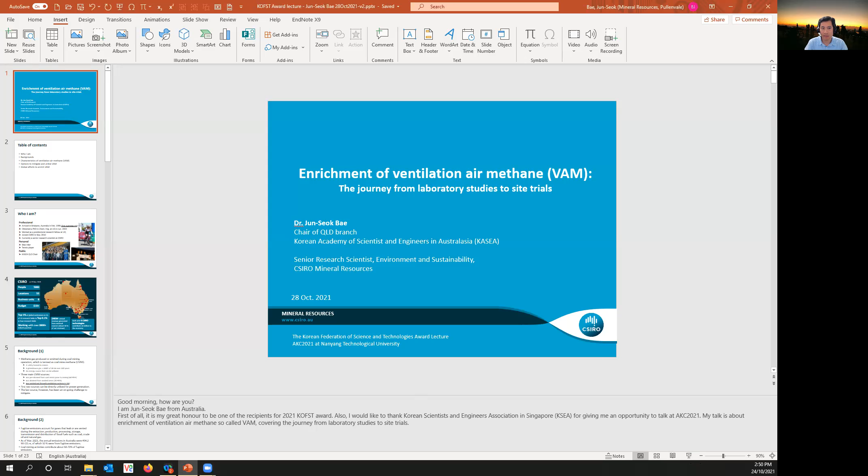My talk today is about enrichment of ventilation air methane, so-called VAM, covering the journey from laboratory studies to site trials. Firstly, I will talk about a little bit of myself, then cover some background for those not familiar with VAM. Understanding the characteristics of VAM would lead to feasible options to mitigate and utilize it. Amongst the available options, my talk will focus on global efforts to enrich VAM.

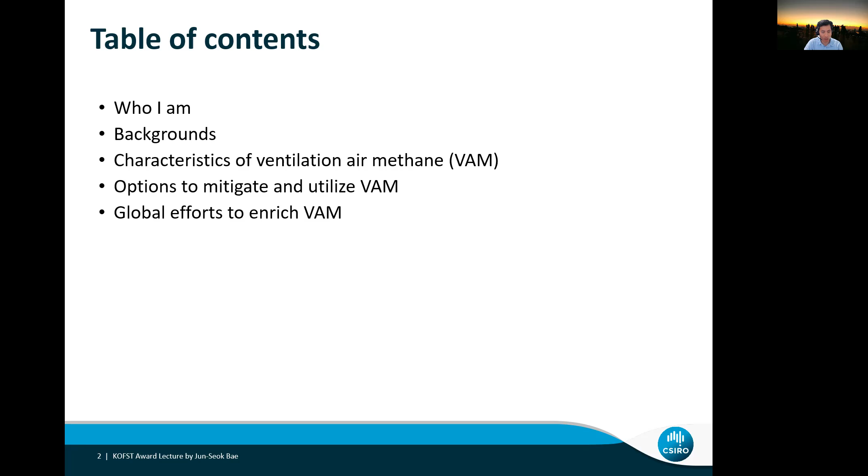Who am I? Well, I came to Australia to obtain a PhD in 1999, which was my first overseas trip. Ever since then, I've been living here in Australia. In 2004, I received a PhD in chemical engineering at the University of Queensland and then worked for a while before joining CSIRO in 2010. Personally, I'm a bike rider. Actually, last Sunday I rode 100 kilometers from Brisbane to Gold Coast with an average speed of 33 kilometers per hour.

Also, I'm a tennis player. I have won some competitions. Publicly, I'm the KASEA Queensland chair. Especially, I was the local chair of 2018 AKC in Brisbane.

CSIRO stands for Commonwealth Scientific and Industrial Research Organization, one of the most multidisciplinary research organizations in the world, with staff located at many sites throughout Australia and 3 overseas. I'm based in Brisbane, one of the sites in Queensland.

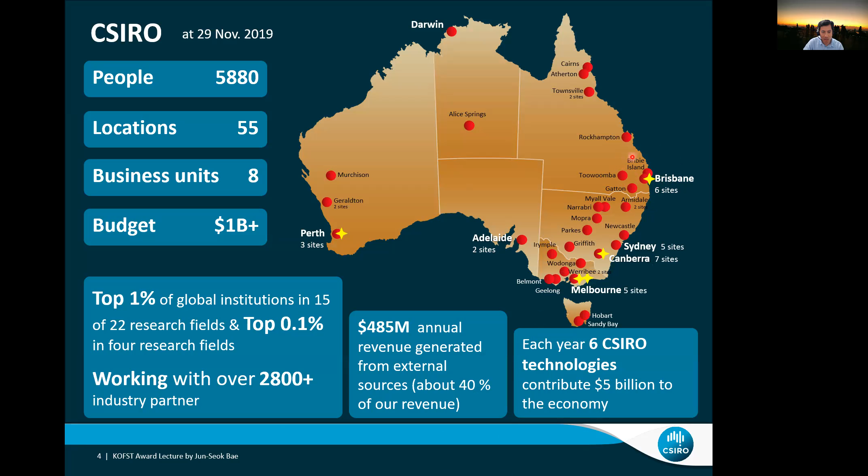There is a term called coal mine methane, CMM, which is methane gas produced or emitted during coal mining operations. Methane gas is a safety hazard to miners and also a greenhouse gas, with a global warming potential of 28 to 36 over 100 years. Also, methane is an energy source that can be utilized. There are 3 main CMM sources.

Prior to mining, you need to drain for safe operation, so that methane gas concentrations are between 60 to 95%. During mining, you also need to drain the gas, typically 30 to 95%, depending on site specifications. The last source is the ventilation air supplied for miners underground, which typically contains less than 1% methane.

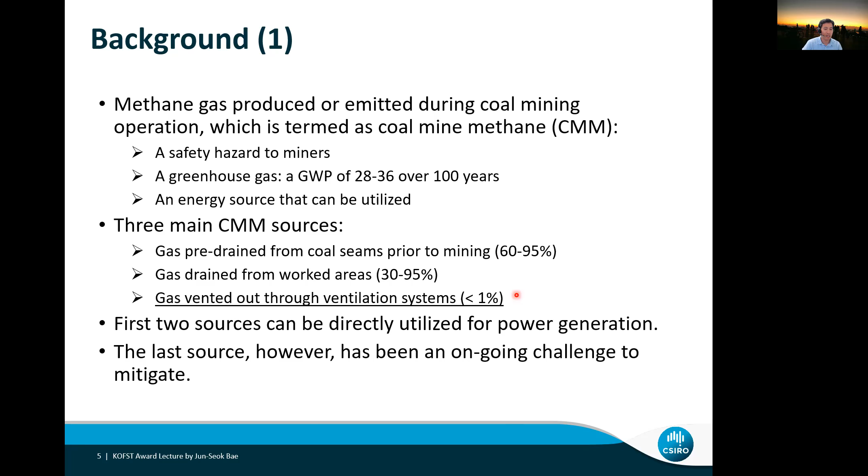The first 2 sources can be directly utilized for power generation, but the last source has been an ongoing challenge to mitigate. Fugitive emissions account for gases that leak or are vented out during processes related to fossil fuels, such as coal, crude oil, and natural gas. Methane in ventilation air from underground coal mines is the major emission source of coal mining activity. This is the main reason we focus on VAM to reduce greenhouse gas emissions.

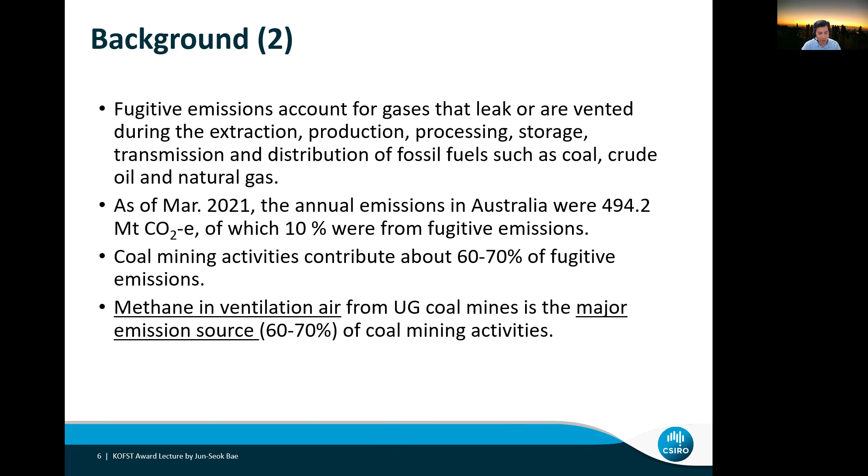Firstly, we need to understand the characteristics of VAM to deal with it. Ventilation air has huge and variable volumetric flow rates. In typical gassy mines, ranging from 120 to 600 cubic meters per second, and also very dilute and variable methane concentrations from 0.2 to 1% in air. There is also some CO2 present.

Ventilation air contains lots of moisture and has very high relative humidity, almost 100% saturated. It also contains dust particles, as you can see in this SEM image. The photo on the right shows a ventilation shaft with suction pumps taking air from underground and venting it out.

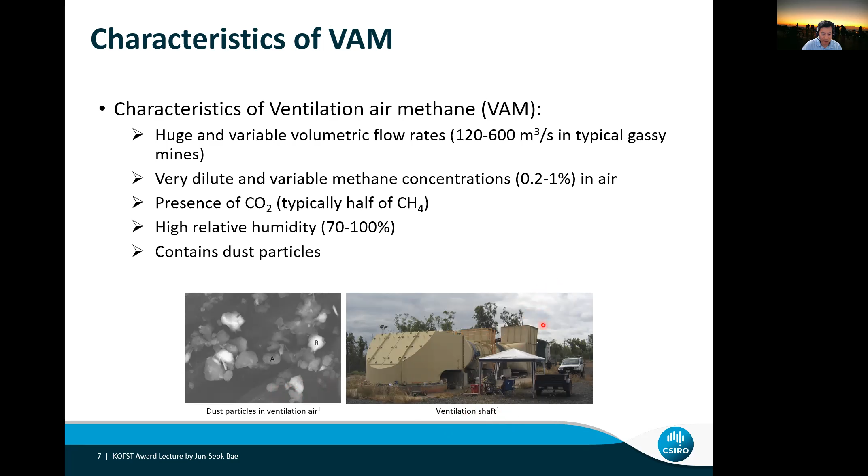So once the characteristics of VAM are understood, how do we mitigate it? There are typically three options. Firstly, VAM can be oxidized as a primary or supplementary fuel, converting methane into CO2 to reduce greenhouse gas emissions. Secondly, it can be utilized for power generation. The last option is to capture and enrich it to a certain level so that other mitigation units can utilize it.

At CSIRO, all three options have been investigated and site trialed at an Australian coal mine. The first photo shows a prototype unit to oxidize VAM directly. The photo in the middle is a power generation unit that requires a constant methane concentration in the feed stream, generating about 25 kilowatts. The last one is a VAM enrichment unit that I designed. My talk today is about this VAM enrichment unit and how we developed the whole process.

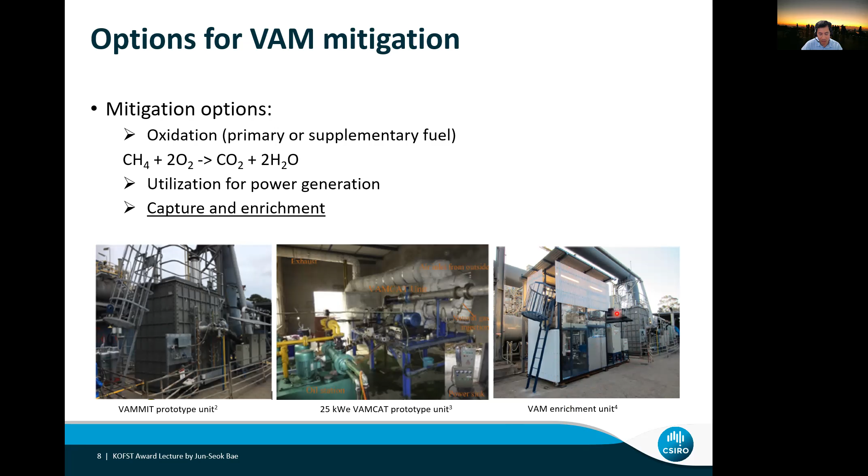So what was the motivation for VAM enrichment? Here are some key motivations. As I mentioned before, power generation units require a minimum methane concentration, so a supplementary fuel is typically required for self-sustainable thermal balance. Also, for stable operation of mitigation units, we need a stabilizing mechanism to ensure stable operation and minimum maintenance for continuous power generation, acting as a buffer. VAM enrichment also offers more greenhouse gas emission reductions than simple oxidation, because simple oxidation generates CO2.

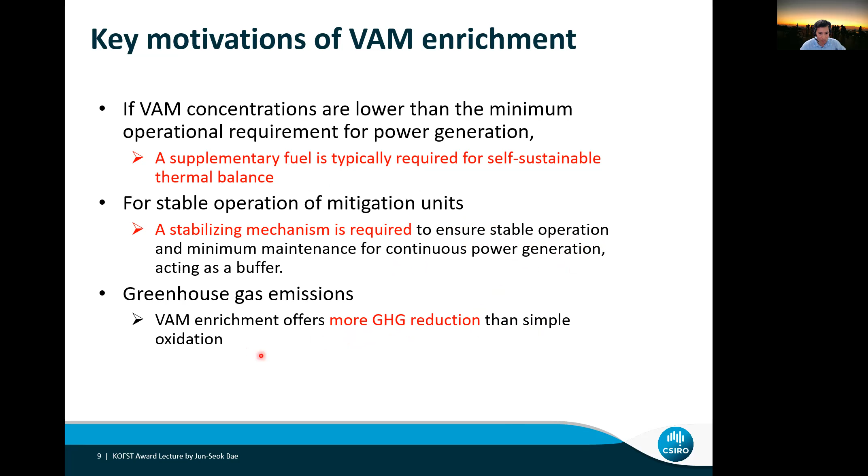In the course of any VAM enrichment process, we need to avoid this explosive range in gas phase methane. In addition, it will be good to keep the oxygen level below 12 percent, so it's safer to operate.

So there are several options to enrich VAM. Hydrate formation requires pressurization, having slow kinetics and low methane recovery.

With ionic liquids, CO2 is preferentially absorbed over methane, and it requires long gas-liquid contact time, so you can imagine the design and size will be huge, bigger than other processes. And for membrane separation, the membrane itself has low selectivity over other gases, and we also need pre-treatment to remove dust, which requires more capital and operational cost.

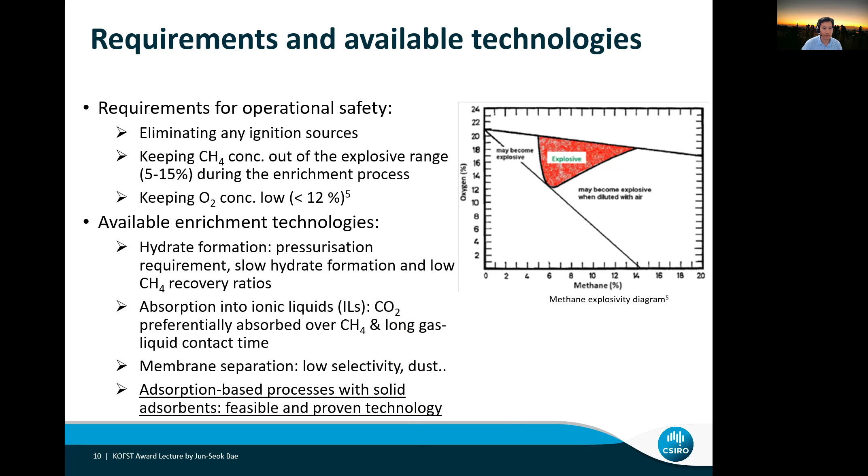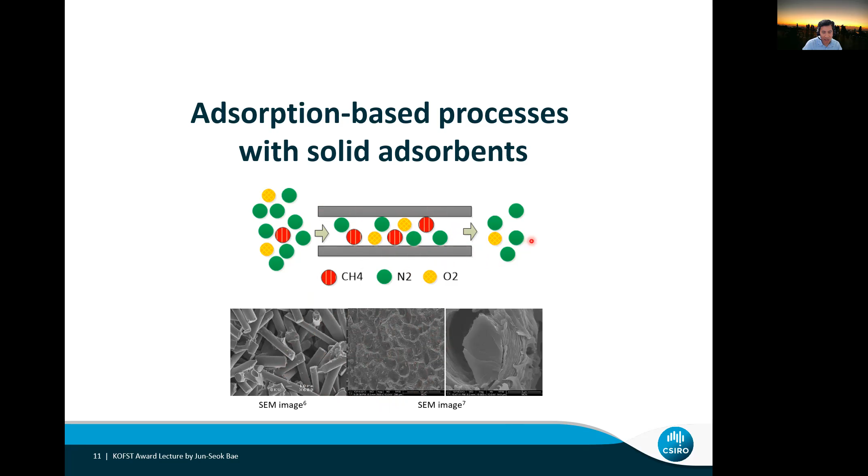Let's talk about adsorption-based processes with solid adsorbents. There are two research directions: development of the process, how we capture and release the captured methane and how we operate, and also how we make good adsorbents to deal with the characteristics of VAM. So at CSIRO, we have been investigating both sides.

Initially, the adsorbent needs to have a high methane adsorption capacity, and also high methane selectivity over nitrogen and oxygen. We also need fast adsorption and desorption kinetics, adequate mechanical strength, and chemical stability and tolerance, especially to moisture, since there is moisture in the ventilation air, so it should have negligible effect on methane capture capacity.

Also, the regeneration energy is the main source of energy consumption for this process, so you need to minimize the regeneration energy, and of course the adsorbent cost needs to be considered.

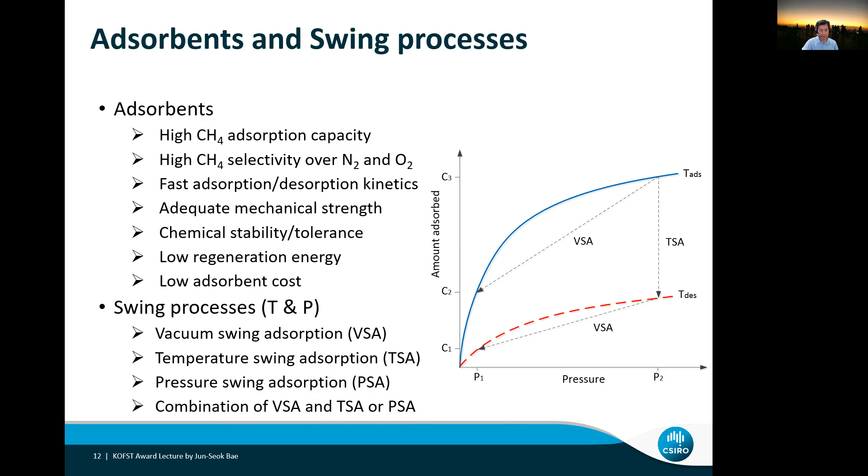The gas adsorption capacities of any solid adsorbent should be considered at relevant partial pressure rather than ambient pressure. The effect of moisture should be tested to be negligible for VAM enrichment. Remember that ventilation air contains almost 100% humidity.

Also, the adsorbent should be in structured form, either pellets or monolith, for scale up. If you have powdery samples, it's hard to scale up, and there are also lots of engineering issues during the process.

Suppose we have 3 samples, A, B, C. If you look at the adsorption capacity at 100 kilopascal, which one is best? Of course, sample B is best. But if you look at the relevant partial pressure, which ranges from 0.3 to 1 kilopascal, sample A is the best.

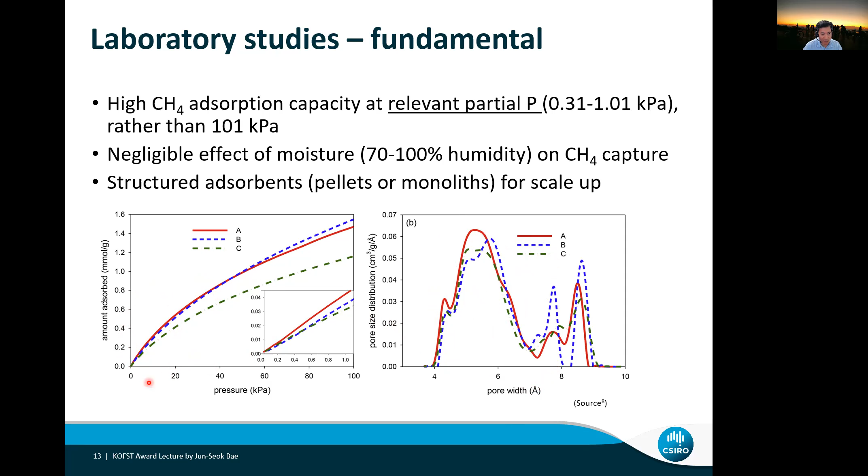This is confirmed by looking at the pore size distribution. On the right-hand side, sample A has higher peaks of pore sizes less than 6 angstrom. So you can either check the pore size distribution at this range, or the adsorption capacity at relevant partial pressure, to select the best adsorbents for VAM enrichment.

At CSIRO, we have been developing carbon composites to meet the requirements I mentioned before. As you can see from the graph, CSIRO's carbon composites possess almost double the methane adsorption capacity of commercial activated carbon.

I didn't show the detail here, but if you look at the low pressure range, it's more than 2 times higher.

So we made carbon composites in a honeycomb monolithic structure to deal with the high dust environment and reduce pressure drop at the lab small scale. We looked at the detailed compositions and also conducted laboratory breakthrough tests.

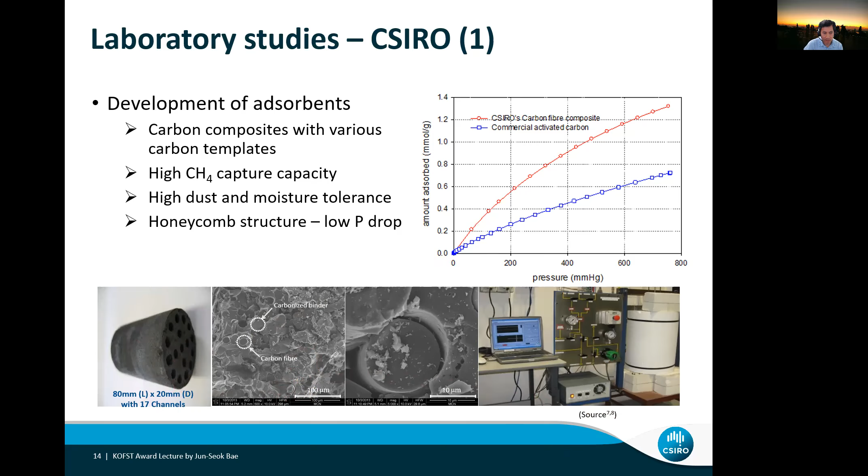We also improved the methane capture capacity by using bio-waste such as Macadamia Nut Shells. About 40% of the world's macadamias are produced in Australia. The Macadamia Nut Shell contains lower ash content than other nut shells, giving it high methane adsorption capacity.

We also tested the moisture effect on methane capture capacity and found it negligible. You can see here we improved from carbon fiber composites to Macadamia nut shell derived composites, improving the breakthrough time, meaning increased performance capacity, while the moisture effect remained negligible. If you look at the low pressure range, we improved about 35% over the carbon fiber composites we made previously.

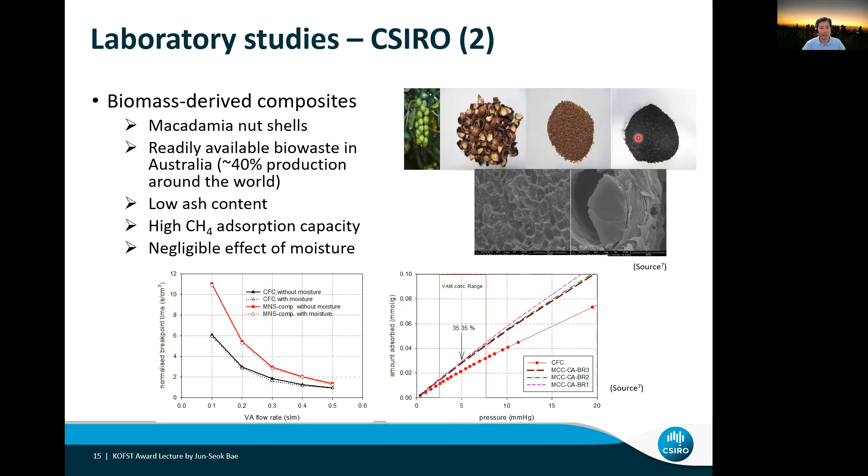So that's Macadamia nuts in a tree, and this one is a shell. We grind, carbonize, and make composites with other ingredients.

Along with the adsorbent development, we investigated suitable processes. There are two processes that have been used for VAM enrichment. The first one is vacuum pressure swing adsorption, called VPSA. University of Science and Technology in Beijing enriched VAM from 0.3 to

7.73%. Another university increased it from 0.42 to 1.09%. At CSIRO, we used vacuum and temperature swing adsorption process, so we can enrich 5 to 11 times, and we can regulate how much we want between 5 to 11 times by regulating the vacuum pressure.

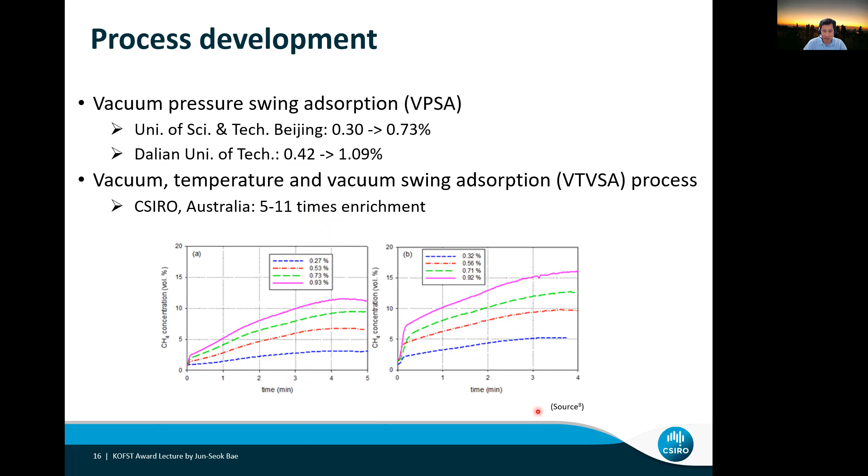So that's 5 times enrichment on average. On the right-hand side, the figure shows 11 times enrichment on average, which is the world's best result.

For the process level, we made large carbon composites in rectangular or cylindrical shapes. The length is about 10 centimeters, the width is about 3 centimeters, and the height is about 20 centimeters. This one is slightly bigger.

The basic idea of the VTVSA process is that the initial vacuum removes mostly nitrogen and oxygen from the composites, because the affinity of methane is greater than that of nitrogen and oxygen. The composites are then heated up to desorb the captured methane, and finally we apply a vacuum again to take the desorbed methane out of the composites.

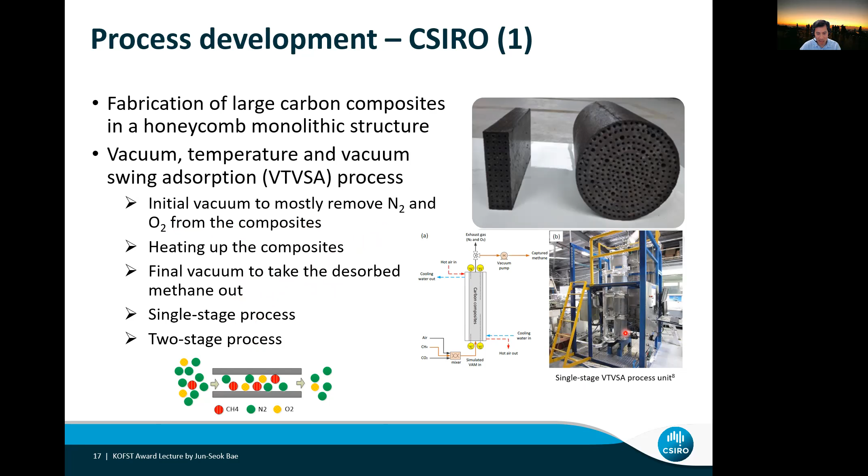So we developed single-stage and two-stage processes. The photo here shows a single-stage unit that I designed. As I mentioned, with the single-stage process we can achieve 5 to 11 times enrichment.

With understanding from the results of the single-stage processes, we designed a two-stage process to operate in a safe manner at the coal mine sites.

What makes our technology unique is that the enrichment process stays out of the methane explosive range, increasing methane concentration from less than 1%

to less than 5% through the first stage, and then increasing methane concentration through the second stage to over 20% or 25%, depending on the initial vacuum pressure. So we can regulate the initial vacuum pressure to keep the gas phase methane below 5% after stage 1, and then it jumps to over 20-25%.

So in stage 2, this is in the adsorption phase, and it's safe as long as it's not in the gas phase.

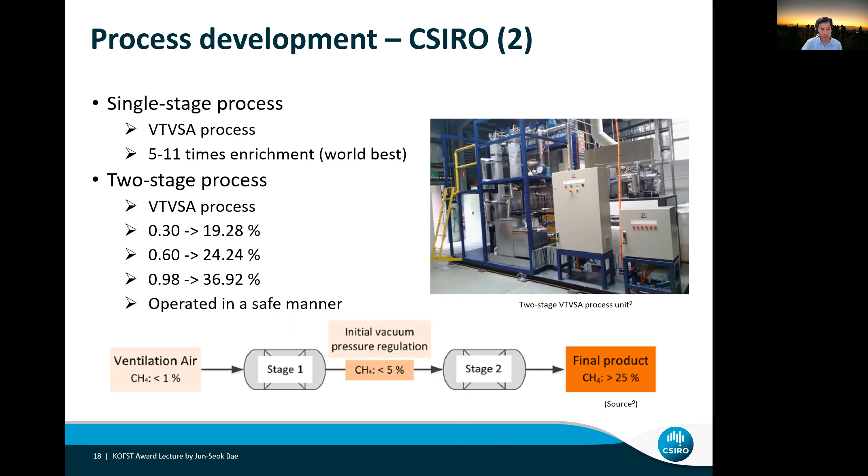This is a two-stage VTVSA process unit that I designed. This unit went to the site and we tested it.

As of today, two processes have been site trialed. The first one is at the Julong mine site in China. They used coconut shell activated carbon with a two-stage vacuum pressure swing adsorption process, with treatment capacity of about 500 cubic meters per hour.

The enrichment performance went from 0.2 to 1.2%, and they operated in continuous mode.

Whereas at CSIRO, we used carbon fiber composites with a two-stage vacuum temperature and vacuum swing adsorption process. Our treatment capacity is smaller than the Julong mine site.

The enrichment we obtained with real VAM went from 0.58 to 28%.

Because the VAM concentration varies, this is the averaged one: 0.73% to 32%.

As I mentioned before, we operate in batch mode, so if we operate in continuous mode, we expect this performance would be improved further.

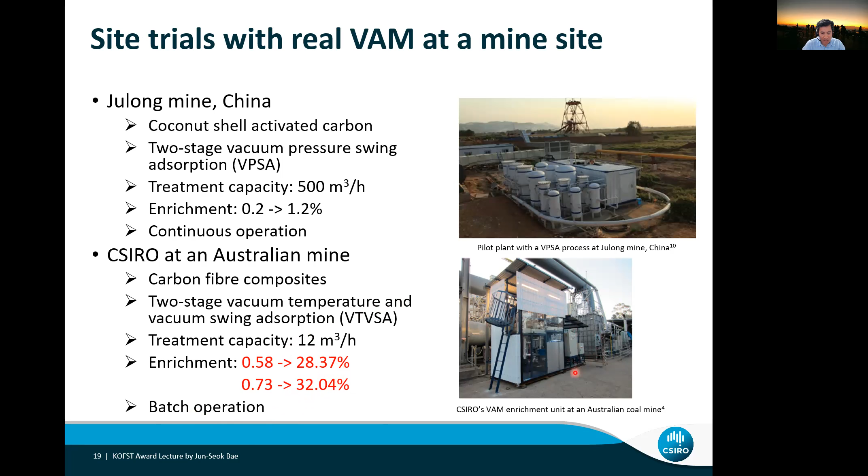In summary, mitigation of VAM is an ongoing challenge due to its intrinsic characteristics. In terms of VAM enrichment, adsorption-based technology is the way to go.

We have been studying in this area for many years, and our conclusion is that adsorption-based technology with solid adsorbents is the approach. Adsorbents need to be structured and tolerant to moisture and dust environments, which is why we chose a honeycomb monolithic structure that can be applied at the mine site.

CSIRO developed the world's best results with the single- and two-stage vacuum temperature and vacuum swing adsorption processes. We also successfully demonstrated this technology in a safe manner at an Australian mine site. We went through all the mine site regulations and standards for site trials, and we made it successfully.

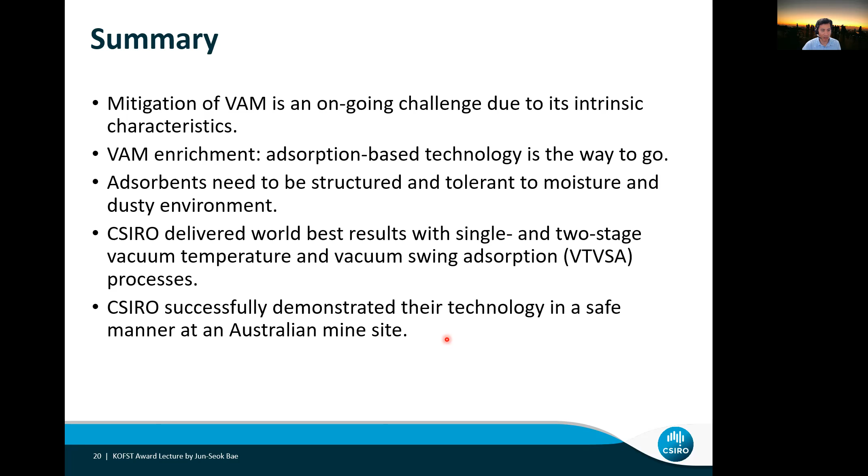A special thanks goes to Dr. Shi Su, who leads the emissions abatement team in CSIRO Mineral Resources. His dedication to VAM research is well recognized in this area. I would also like to thank his team members, including Xin Yu and Jun Yin, for their support.

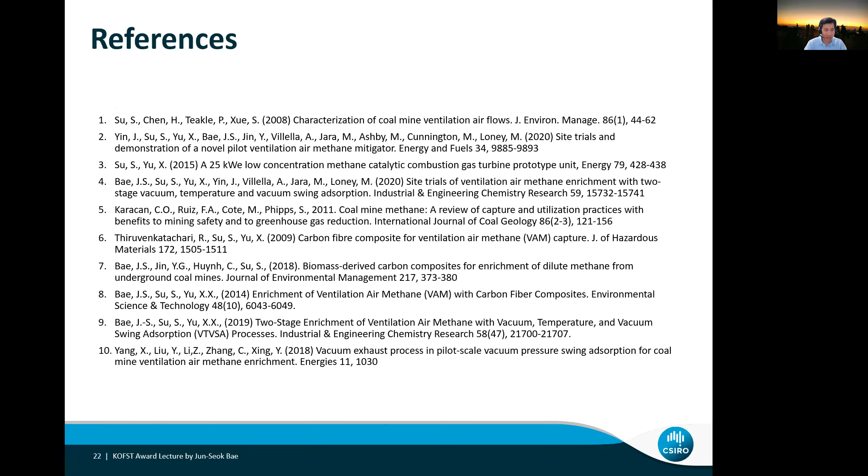These are the references, if you are interested, have a look. I'm sure you may have some questions; you can direct them to me, or for any VAM oxidation and utilization questions, you may contact Dr. Shi Su directly for further information.